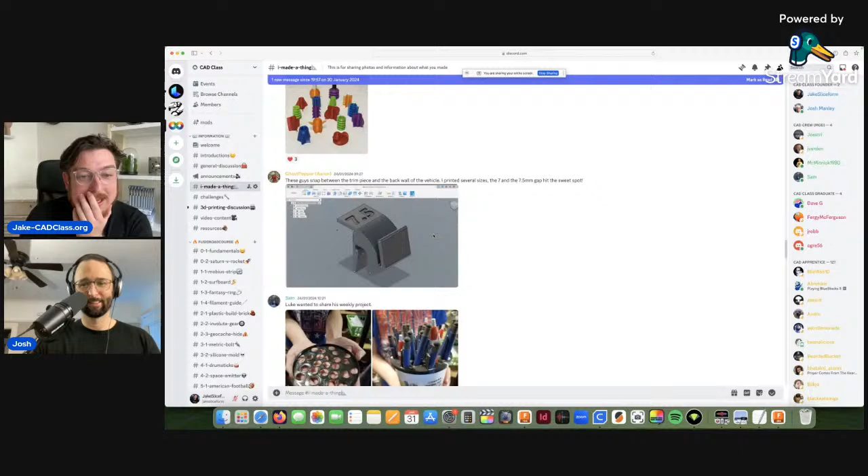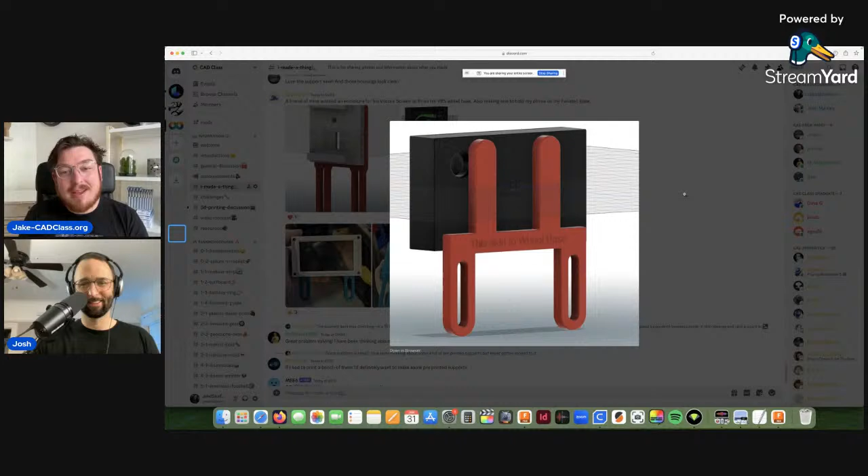Let's jump into it. As always, I'm usually the one seeing these at the exact same time as everyone else. So I want to go into the I made a thing channel. I'm going to scroll down to the very bottom. I did take a little sneak this morning. This thing that Wookoo's making: a friend of mine wanted an enclosure for his Vocore screen to fit a VRS wheelbase. I don't know what any of these words are, but that's rad. It looks like a screen mount for, oh, I bet it's a VR racing thing. That's really awesome. And it looks like they actually printed it out. That's a really nice print.

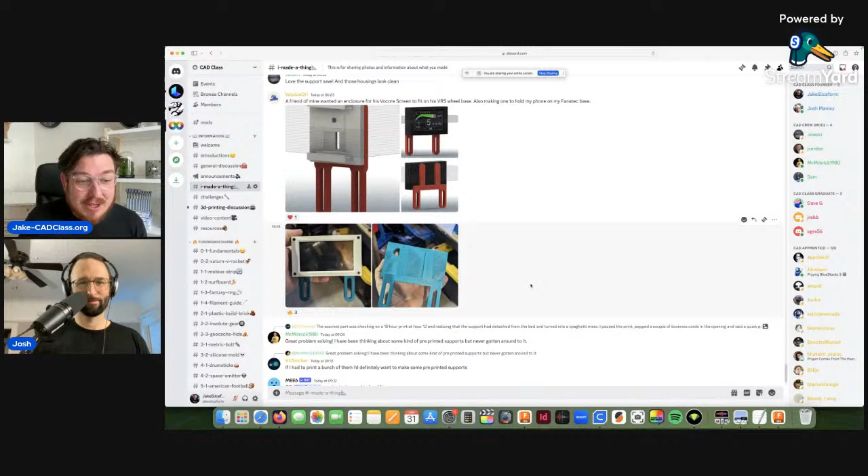Can I just say one of the best things that has elevated 3D printing so much is a textured build plate. For a lot of people, the original build plates were just glass or paper or tape. They were absolutely terrible, so you always had one surface of your print that looks like garbage. And now on all of our prints, the very first layer looks so nice and textured, you really can't tell that it's even 3D printed. So you always have one surface that looks so rad right off the bat. This is another great example of that. That turned out fantastic.

And then scrolling up a little bit, Kid Snicket, I think new. That's Cadence. Oh, is that Cadence? Yeah. All right. Finally finished some custom speaker housings for a Vespa scooter. That's awesome. Yeah, those look really clean. I hope the Vespa...

Man, I can't talk this morning. What the heck? Come on, Josh. What's going on?

What is actually going on with my voice? I'm like, you either had too much coffee or too little coffee. I think too little. I chug coffee. You know what? I'm not even going to say what I was going to say. Just ignore me for the day. All right, fine. Take it away.

Jerry's checking it out. 18 hours. With this though, Cadence, I'm curious what you printed that out of. I hope that Vespa is not a Sacramento Vespa where it gets to like 120 degrees, and maybe one day somebody comes back and part of their speaker mount is a little, shall we say, runny. A little melty. Yeah, a little runny. So I'm curious, if you're in here, Cadence, what did you print that out of? And is that the final thing?

And maybe one small suggestion would be use a higher temperature filament, like PETG. PETG is coming to mind for this. Yep. The scariest part was checking on an 18-hour print at hour 12, realizing the support had detached from the bed and turned into spaghetti. Propped up with a couple business cards. Yeah, and it does work.

I don't think it's available on Cura anymore, but there was a setting where instead of using infill, laying down an actual pattern and printing, it would just spaghetti the inside. It would use a fantastically small amount of material, but it would just randomly squirt in a bunch of plastic that, as soon as your part was done, would just jingle around. And for a lot of people, they're like, "Yeah, it works great," and it takes my 5-hour print to like 2 hours because it's using so little internal material. But at the same time, there's always a gamble that it actually doesn't work whatsoever.

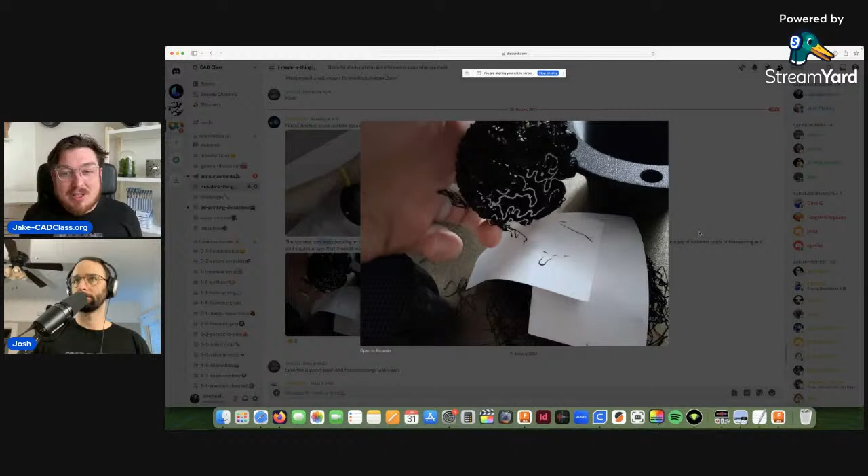So if you have support material and it's all internally held, having it go spaghetti is not the end of the world. It could still correct itself, but spaghetti on external supports, that's just going to fail. That's bad news. So propping up with business cards, actually supporting, that's genius. I love that. So good. And then it looks like the final print just turned out fantastic. It looks amazing. Yeah.

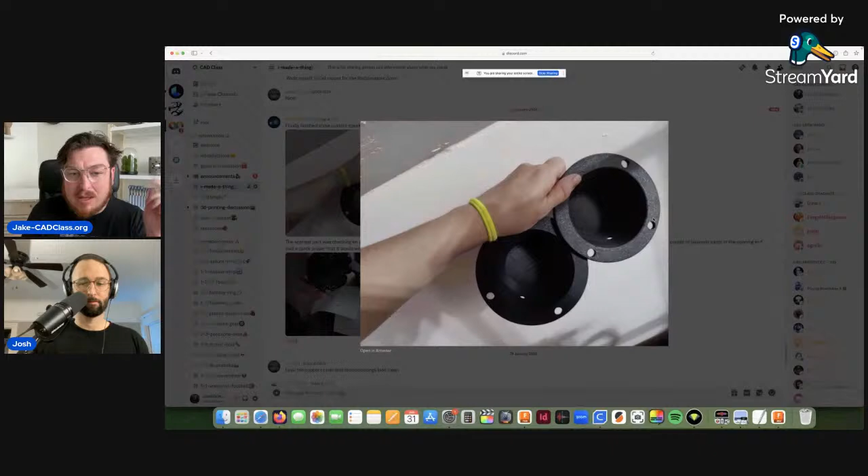So it looks like this surface right here, if you can see my cursor, Josh, was actually on the build plate, and all the material on the inside. And going through the other pictures, it's kind of conically angled. So if it was me, I probably would have printed it in this orientation and then just put supports around the outside, because that's a lot less support material.

The other thing I'm noticing with the supports is that these are very blocky. So I imagine Cadence is just using the normal infill. And I would probably push them to use the tree support, just because it uses less material, less time. More importantly, if you have less time on your print, it's just got a better chance of succeeding, because it's not spending as much time in a precarious state.

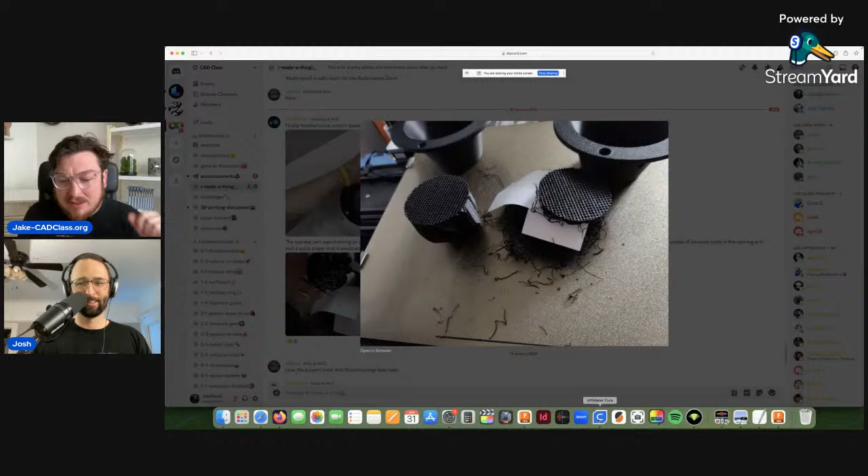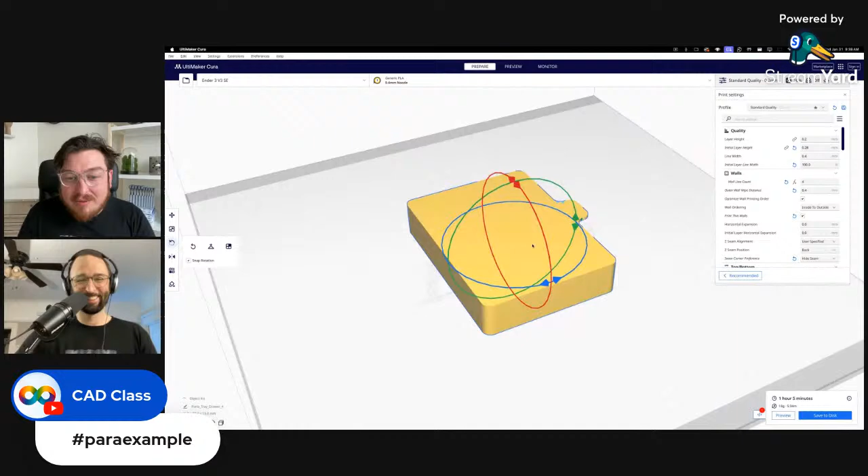The other thing that I found that really helps a lot of people out, I'll actually do a little example. I'm going to go to Cura really quickly, and I'm just going to open up something. I'm going to do a parts drawer. This thing can have some support material in there. For example. So if we just slice this up normally, obviously this isn't going to work too well. There's overhangs, yada yada yada.

But if we wanted to put in some support material, there are some settings that I really recommend. Obviously, generating support is the way to go. Set the support structure to tree. That helps out a ton. The branch angle is literally the angle that the branches of the trees are going off. And then the support overhang angle is 65. That is my minimum of where I would then put some supports. So anything more horizontal than that, I do want some support material on there.

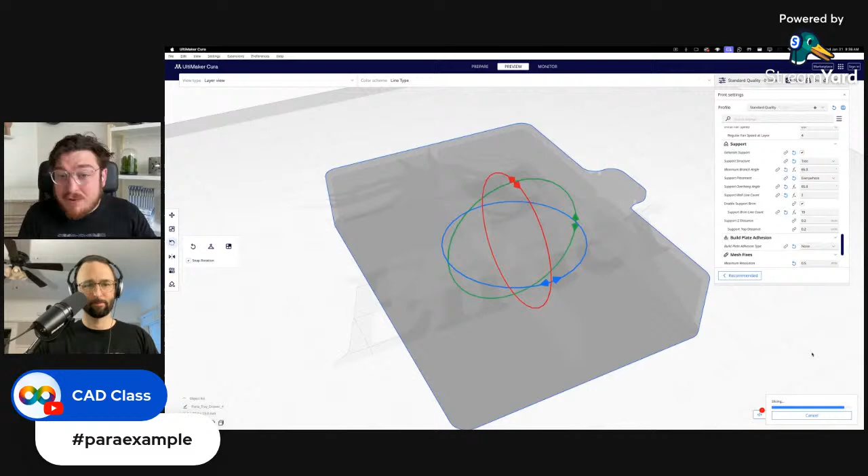Usually this is set to 45, which is completely unnecessary. 3D printers can print at 65 degrees all day long without needing any support whatsoever. And so if you have it at 45 degrees, it just means that you are essentially having a really rough, ugly surface on a place that you don't really need to, because every single time you separate support material, it's gonna look bad, just kind of truthfully.

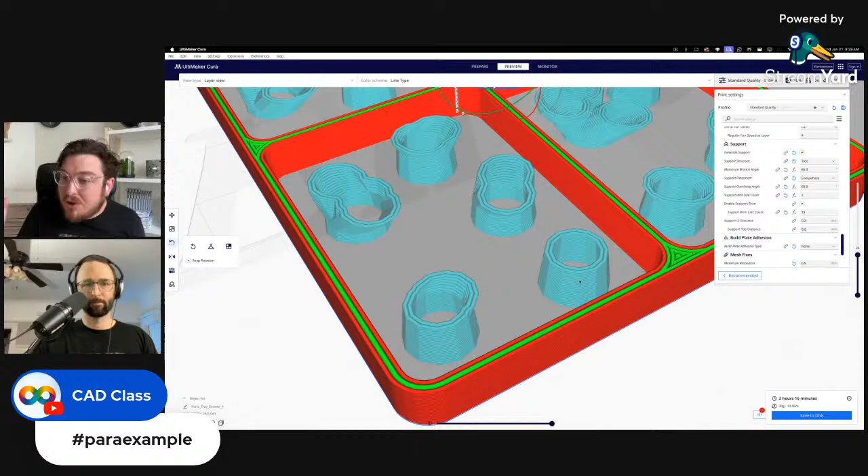The other thing that you may notice is that my support material is actually dual walled. So my support wall line count is set to 2. This gives me a little bit more rigidity in my support structure, and it means it's not going to fall over as much. But because this is such a short print, physically in height, not in time, I could actually get away and put that down to just 1 line count. That's fine. Anything where it gets a little tall, I usually put on 2 walls. That's the way to go.

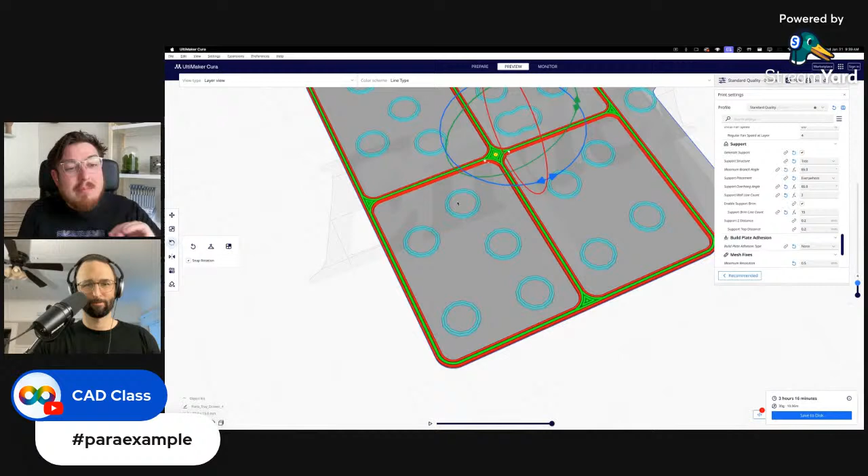But one thing that I do want to kind of put people on is on this one, there is actually no brim to the support material. So I actually do want to have that. But as you can see, I actually already have enable support brim. I even have it set to 15, and it's not showing up whatsoever. And that's because my build plate adhesion is set to none. So I actually have to reset this to brim to then enable that.

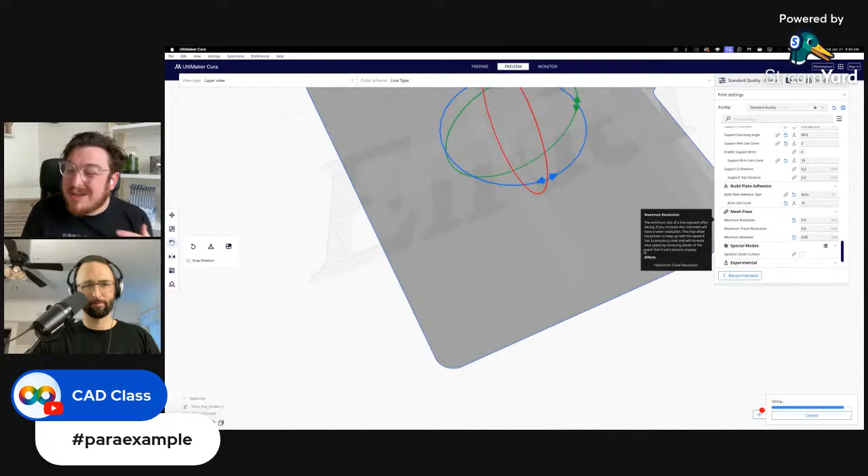The downside is that if I then set this to 0, it's going to give me an error. And so you kind of have to balance between having a brim on your part, so you have to do a little bit extra post processing work, but usually that little bit of work absolutely gets made up for by having a successful final print. So putting brims on your support material is absolutely essential, and then having 2 walls is the other really good trick.

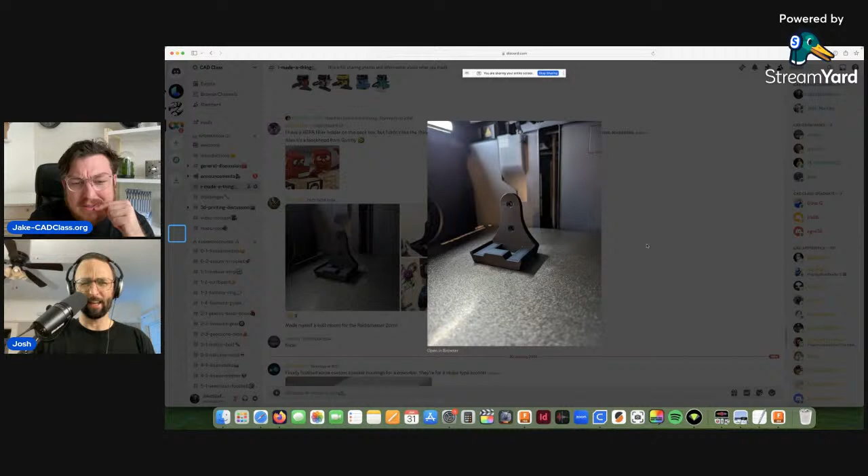All right, I want to show off some more goodies. This one really caught my eye. "I made myself a wall mount for my Radio Master Zorro." That's a nice, neat print. What printer, and who was it on Discord? Dairy Air. I can't believe you still get a kick. What kind of printer is that? Is that a K1? Go back. It looks like a Bambu, maybe, I can't really tell. It's a gray. Anyway, lovely prints.

Nice. Radio Master, not bad. Oh, this is for the... Oh, gotcha. This is for all of his drones. That is really rad.

Dairy Air, we may be reaching out to you because we are going to be putting a drone CAD project into edition 2 of our book that we're currently developing right now. So you may be getting a message very soon going, help. What are we doing? We don't know anything. Help.

I'm not sure I've seen this person. Electric Fish 9 printed a modified air filter that holds charcoal pellets. I used some red ABS for a project and put some faces on it. That's awesome. That's really rad. I love it. I do like anthropomorphizing, which is a super fun word to say on its own. Anthropomorphizing, just like super standard stuff. Yeah, that's awesome. It gives it so much character.

I think this is a good discussion point. Okay. How much do you actually know about the science behind the plastic particles that come in the air off of 3D prints? Like, how necessary is a carbon filter? Depends on what you're printing. Are you talking PLA or what material specifically? Yeah, or just plastics in general. They all have different properties, so they're going to off-gas different amounts of particles, so it really just depends on what plastic you're talking about.

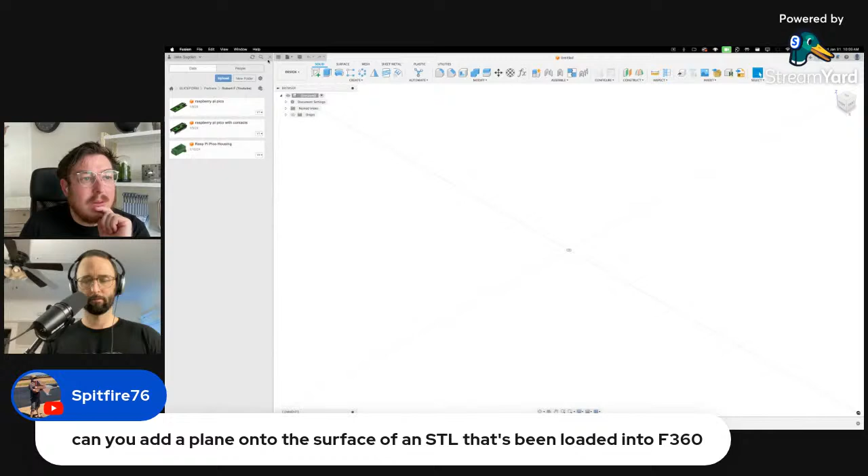I won't show you a model because it'll take a little too long to actually upload. But super duper easy. But there's one button that everyone always misses. As soon as you actually import a model, these are step files. Doesn't count. As soon as you have your STL in the middle, you'll want to go up to Mesh, and then you'll want to click on Convert Mesh. That's at the very bottom of the Modify tool, and it's basically asking you to select the body that you want. Don't worry about the operation of the method.

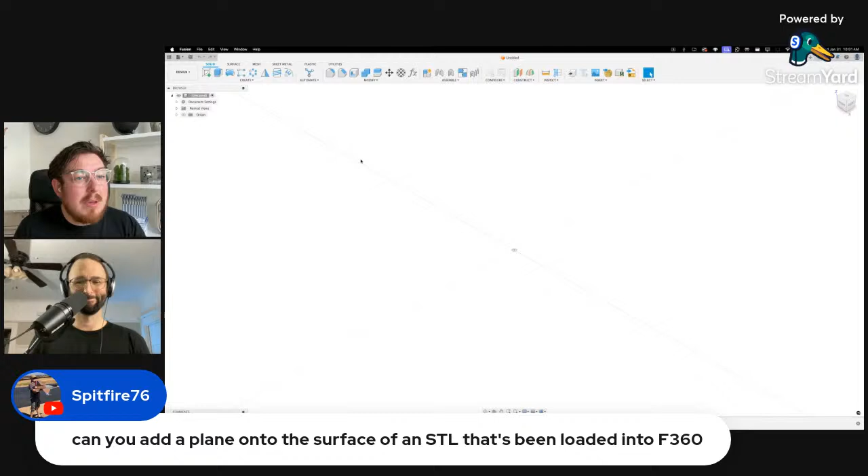As soon as you click OK, it will convert it from being a mesh, which is essentially just a surface. It's a blanket that goes over a 3D object. Then it will actually be a model, so a solid thing. And then all of the different faces will be clickable where you can put offset planes on. So that's the idea. But going back to which project do we show how to do that in, the silicone molding project? Yes, we do. With the skull. And that's in chapter 3. Chapter 3, silicone molding skull.

And then do we do it? Is that the only one we show it? I don't know. It's been a while. It has. It's been a while. Wait, who wrote this book?

I don't know. But the limiting factor is anytime you're importing an STL to be edited with CAD, be careful because it's very tricky. It's just the wrong tool for the job. You can kind of think of it like I have a piece of paper in my hand and I'm taking a picture of that, and then I'm uploading that picture to Microsoft Word, and someone says, "Can you just change that word? Can you capitalize that?" And you're like, "Well, yeah, I could rewrite the whole thing and then change it, but kind of no, practically." So that's kind of how you have to think about it.

Editing STLs is where you want to do it in slicer programs like Cura or Prusa Slicer. If you want to change something about a pre-existing model, make sure it is a step file or STP. That makes life so much easier.

Jake, I have a little bit of bad news. Oh no. Okay. So Fusion just updated, and they broke one of the tools that we use. They broke the coil tool. No. They broke the coil tool. So Serdar, on the geocache hide. Actually, I want to do this live on the pod right now. I know we're going to try to get to making something, but it says help please. So Serdar and the geocache hide: I can't create the coil in the dialog box. It won't let me enter revolution value to 0.1, and it won't let you change that.

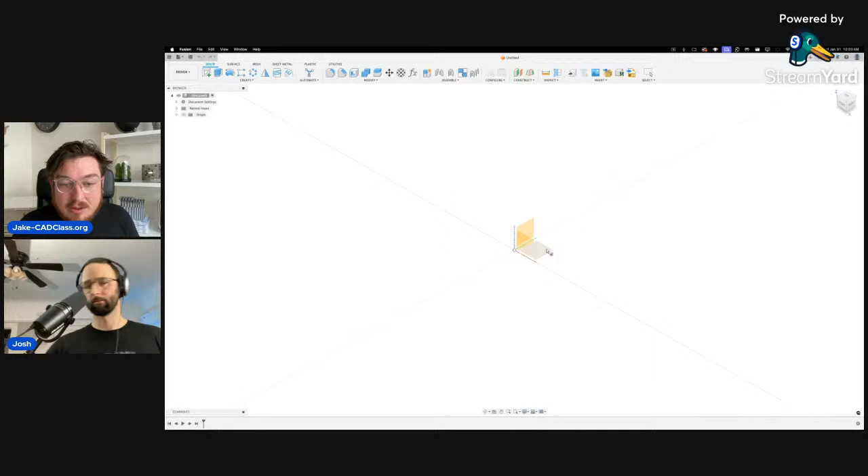Okay. So I want you to open it up. I just saw this on the Fusion subreddit, and somebody said the coil tool doesn't work as it used to. So that would be a huge bummer. But let's go ahead and open it up. I'm going to make that right now. Let me just grab one of the books really quick. I'm not going to do the whole thing to exactitude, but I do want to give you guys as much accurate information as we can. Oh, God, why did we make this book so big, Josh? I don't know. Okay, so I'm just going to start off with making a cylinder on the top plane. We'll see how fast we can do this.

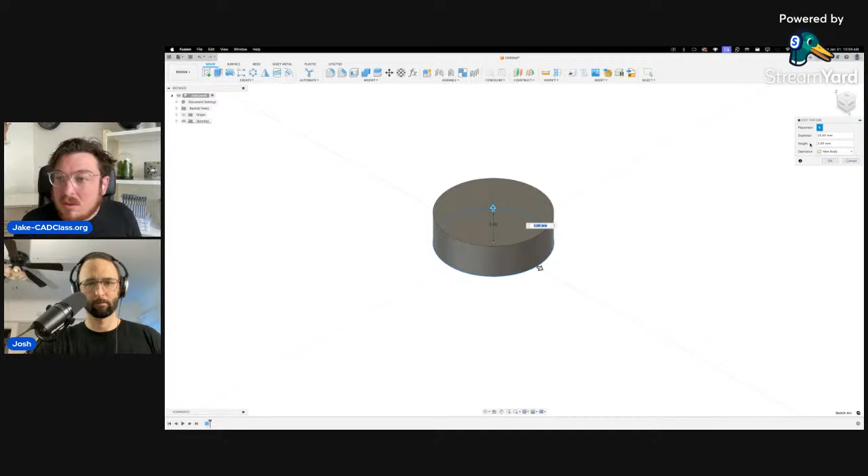Diameter 33, 16 mil tall, grand. Looks good. I want to add a thread onto the outside of that surface. Make sure it's modeled. Groovy. I want to change this over to an M33. Oh, whoops, I did it the wrong way. Diameter 33. That one is 16. I knew it looked weird. Funky. All right, then we added on a thread. This is modeled. Groovy.

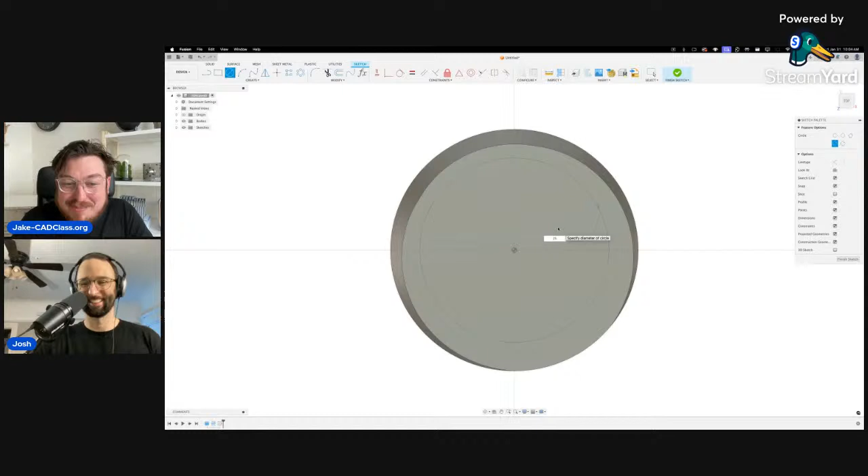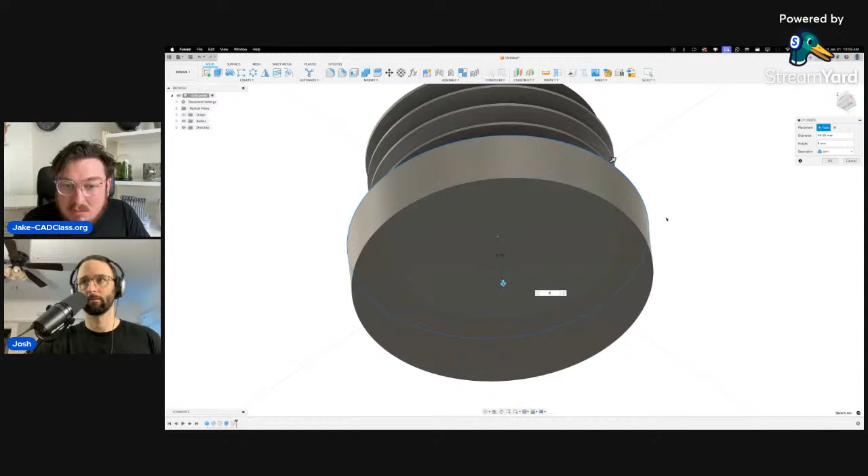Then we are cutting out the very bottom, adding on a circle to the middle. How big is the circle? I really wish I remembered the book I bloody wrote, but I totally don't. Then I'm going to be extruding this all the way through. Don't really care. Make a little triangle to cut that away. That's not important. Then I can make another cylinder below it onto that bottom surface. Great. This wants to be 40 and -8. 40 and then go down 8 millimeters. Groovy. So making a knurl is actually fairly easy.

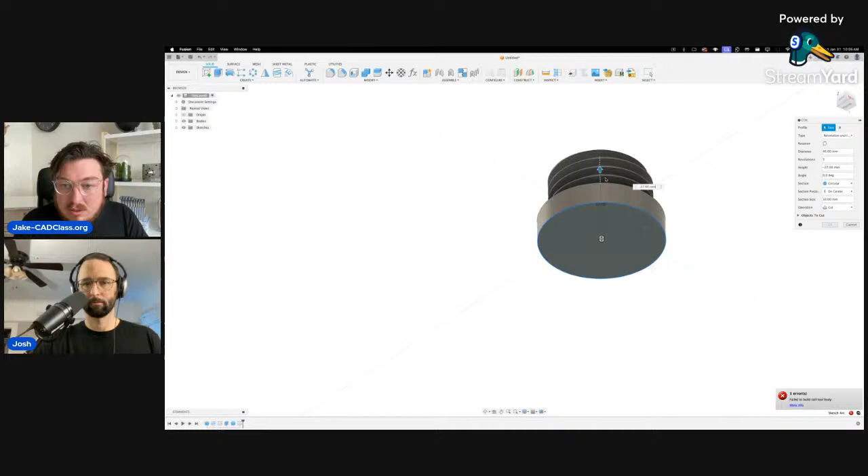So we're going to be using the coil tool. I want to select that circle. So I'll start at the origin, pull out to that 40 millimeters. Okay, and then I'm just going to be bringing this arrow upwards, so it's actually going to be cutting in the right direction. Obviously, it's the wrong shape and size. But the diameter is 40 millimeters. Yep, the revolutions is 0.1.

That doesn't like it, but we'll press on. That's exactly the error that Serdar got. Right there, that error that you're getting. Triangle internal, it's on the inside. And this is a 1.5. There's a cut. What the hell? Okay, so what happens if I increase it just... So it likes 1.

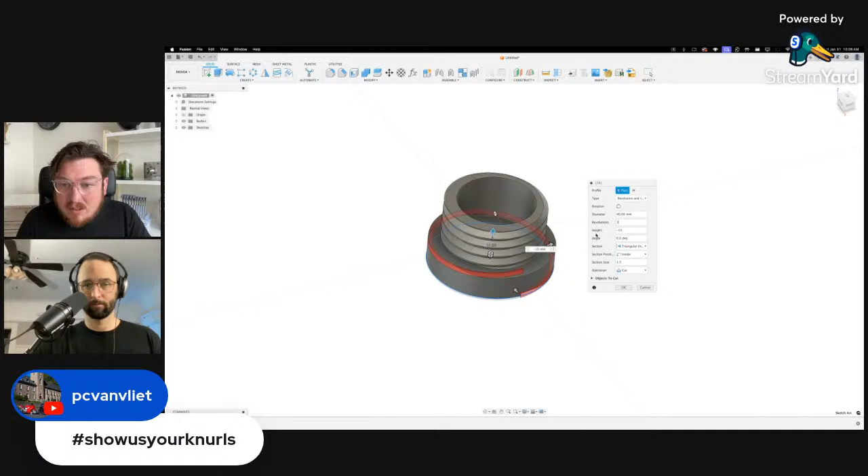That's very strange. If I go to 0.9, it doesn't like it. Error. Yeah, this is exactly what it said on the subreddit. It said anything under 1, it won't take it. That's really strange. That's very, very funky. Why would it do that? Let me change it to a different type. So that was revolution and height. We'll do height and pitch. See if we can mess around with that.

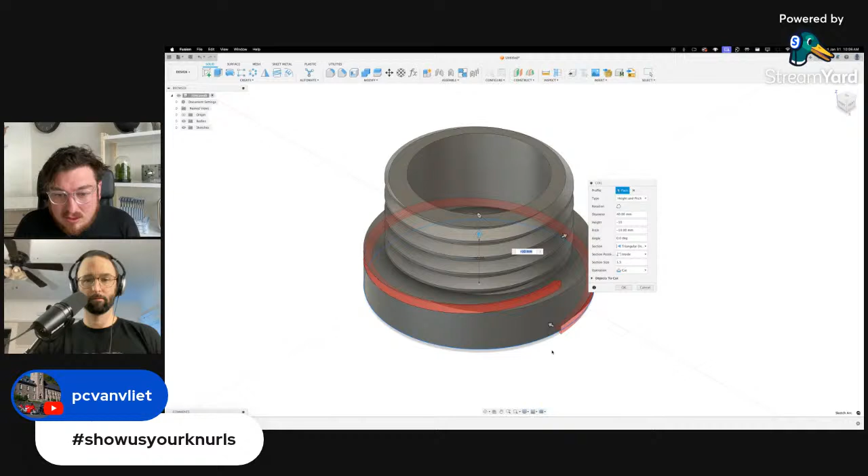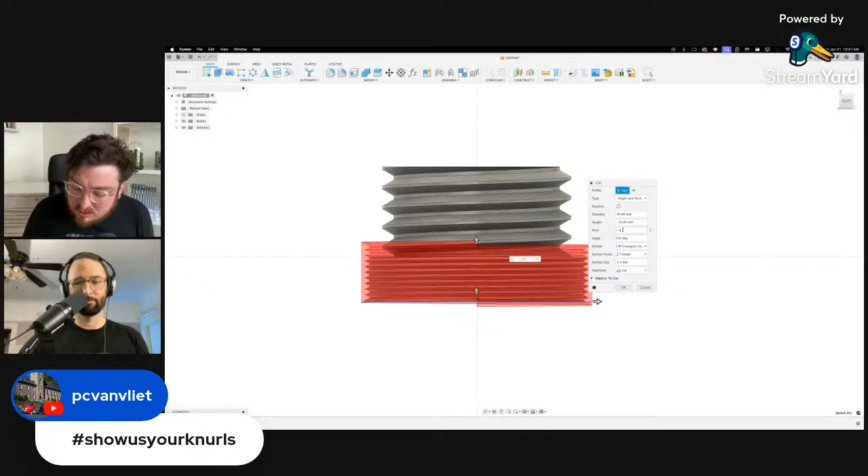That's the inside. Don't want that. Pitch. Oh gosh, no, that's no. What? -5. Can that be a positive number? Oh, that's going the opposite direction. -1. No, that's not what I want. So what about -100? Oh, yeah, it must be based on the revolutions of it. So it doesn't like that.

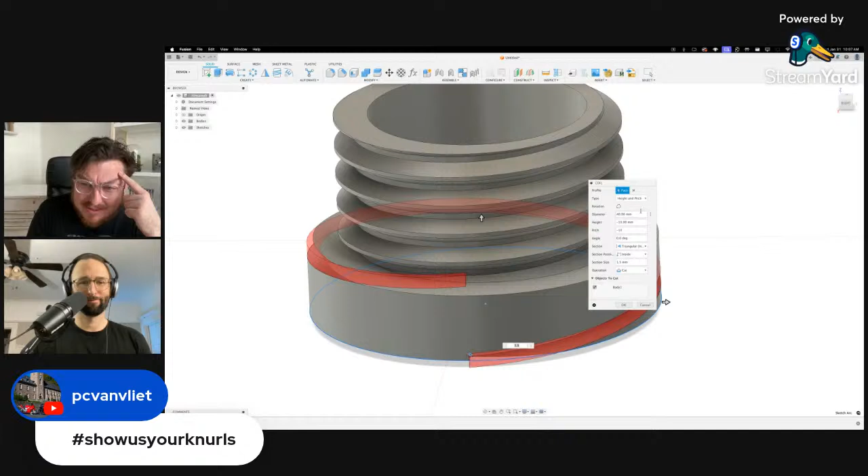25? 20? 10? Oh my god, that is so strange. Yeah, it won't go anything above that. So even like -11 for the pitch. Oh, that's so bloody annoying. Why would that even be a thing? That's such an... Oh my god. So yeah, that's not going to be... So then it doesn't matter what you choose, it's just going to be restricted to 1. That's really fantastically annoying. Okay, guys, we'll show you the fix.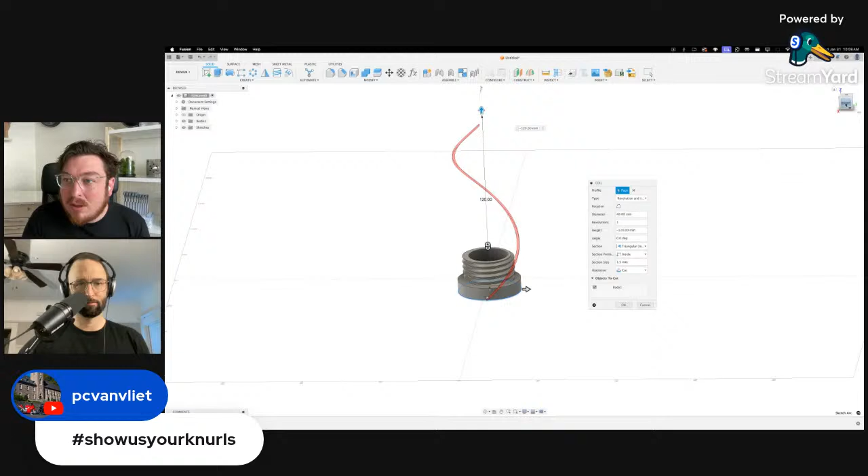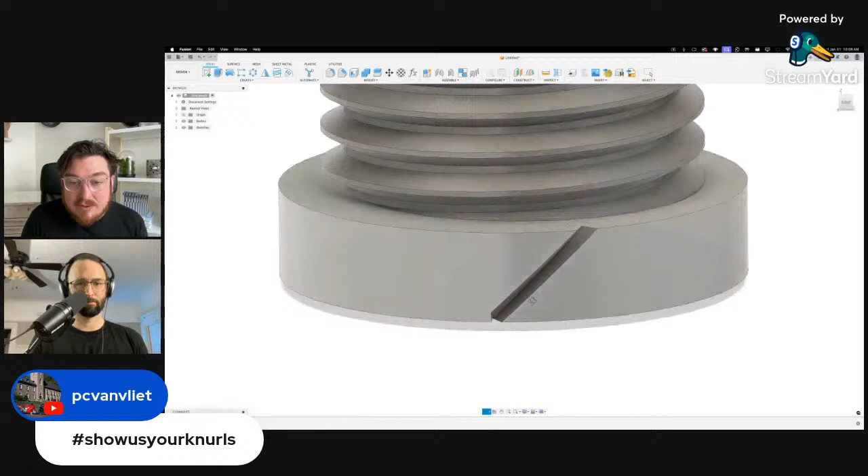And that is simply to keep it as 1 revolution, but to bump up the height massively so you can still get that angle. So the idea with the knurl is that to make a diamond pattern, you want this to be at about a 45-degree angle. So instead of the revolution set at 1, the height, instead of being just the height of this piece of 16 mil, just massively crank it up. That gives us our cutaway at about the right angle.

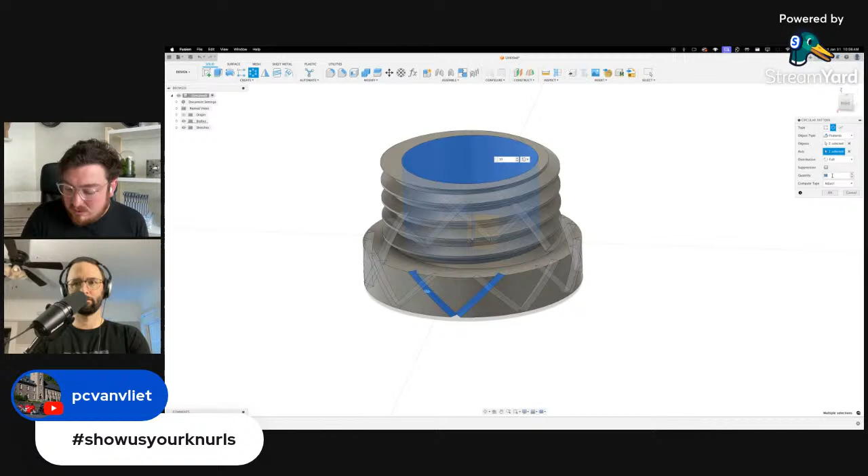Then we can mirror that feature. Mirror that coil about the front plane. Yep, cuts it away. And then we can do a circular pattern of the features. That would be the coil and the mirror. And then the axis is around the center. Then we can increase that to whatever we want. 20, doesn't really matter. And then that'll solve in a second. Yeah, that works. Gosh, that's really strange.

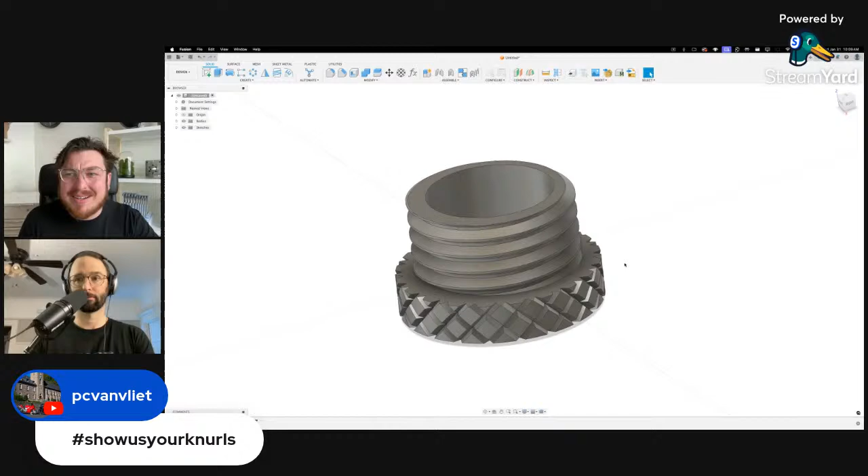I've never seen that before. I think they just introduced that bug. Something broke it. There's no way that's a feature, that's a bug. God, that's so bizarre. Gosh, okay, well, I hope that helped people that are actually running into that issue, because that's ridiculously annoying.

We're also going to have that issue in the fire piston, right? Yeah, as well with any of the knurls, actually. So anything that's knurled, we're going to have to add a link inside the course and then edit the PDF. So we'll add that to our edit list. That's super frustrating. I mean, we know some people on the Fusion 360 team, so we'll definitely reach out to them and say, hey, fix it.

Yeah, super bummer. Anyways, slightly related but kind of not really, Fusion 360 is changing its name. In fact, it has already changed its name. It is now no longer Fusion 360. It is Autodesk Fusion. Woo! Can you picture how many executives needed to sit in a room, and for how long, to make a decision about that 360 part?

Like, hey Bob, so it's Fusion because we're joining a bunch of different parts of different CAD programs together. Yeah. What the hell is 360? Oh, Jim thought of that. Well, Jim's fired. Yeah, Jim's gone, he hasn't been here forever. Let's get rid of that 360. I mean, can you imagine the branding nightmare?

All right. So if I'm making a hole that I'm going to be printing where the axis of the hole is parallel to my build plate, if I just make a little wall right here, and I make a little circle in the middle, and I extrude it out just to give it a little bit of depth. If I know that I'm going to be printing it in this orientation and I'm putting a rod all the way through it, everything is going to be totally fine on this bottom surface.

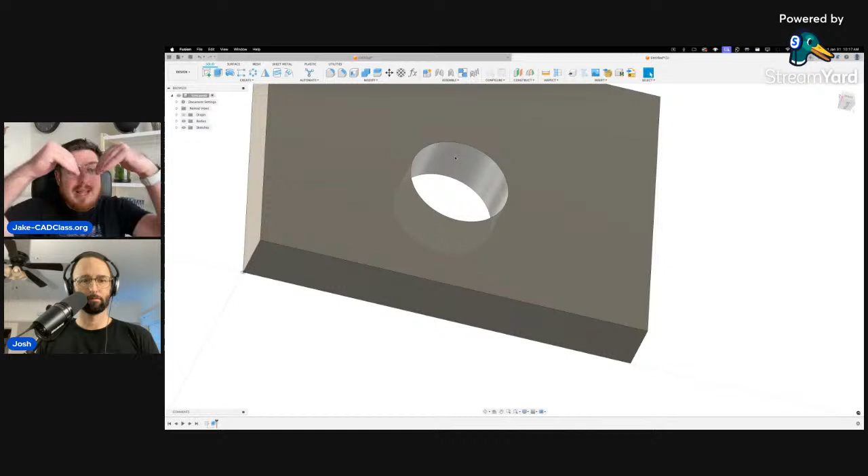But at the top, that's where the plastic actually will fall in and droop a little bit, and it gives you a really, really crappy surface. So it means the cylinder won't be able to pass through, or the rod won't be able to slide in very easily. There's going to be swarf, which is the more technical terminology. It just gives you a pretty crappy surface.

So one of the things that you can do about it is to recognize that you can print at a 65-degree angle and delete some of that material. So you can basically make some tangent lines, if I just add on some tangent constraints, make these totally equal. We want to make sure it's obviously right above the center of our circle.

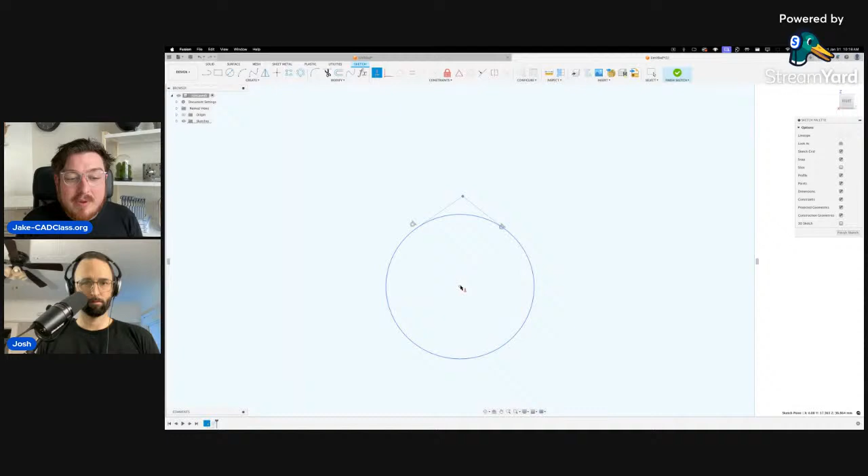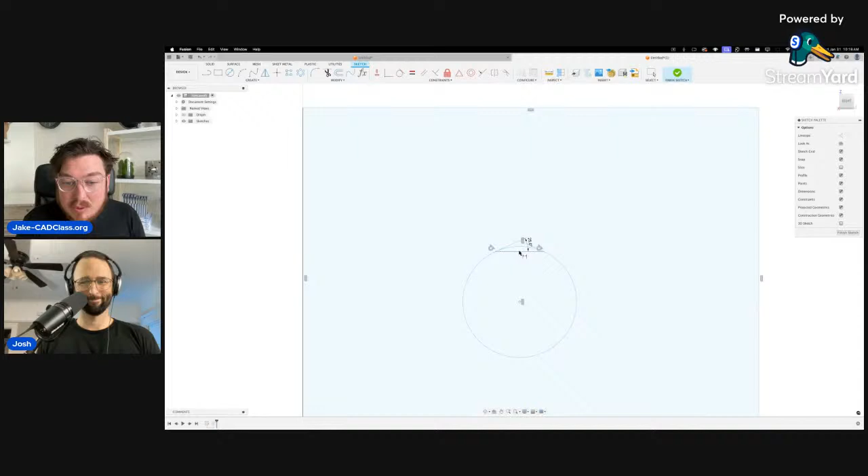But if we make sure that these are printing at 65 degrees, so if I make a little construction horizontal line and set it to be, like I said, 65 degrees. Oh, whoops. It should be 90 minus 65. Excuse me. There we go. Yeah, 25 degrees. Then we actually have this kind of party hat surface to it.

Yeah, there you go. So it is mostly a round surface, except for the top sections where we know these tangent angles are going to print perfectly fine. There's not going to be any droopage, and we still have the majority of a round surface. That's the idea. If that makes sense to you, Josh, then I guess I'll continue onwards. Does that make sense? That makes sense.

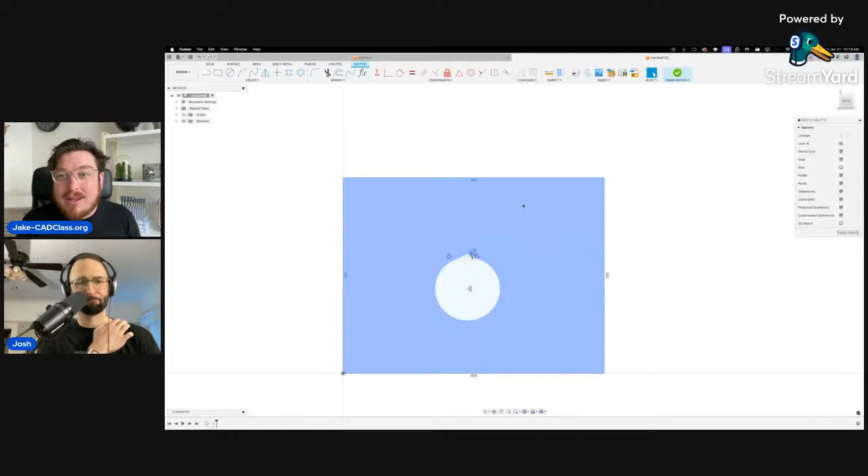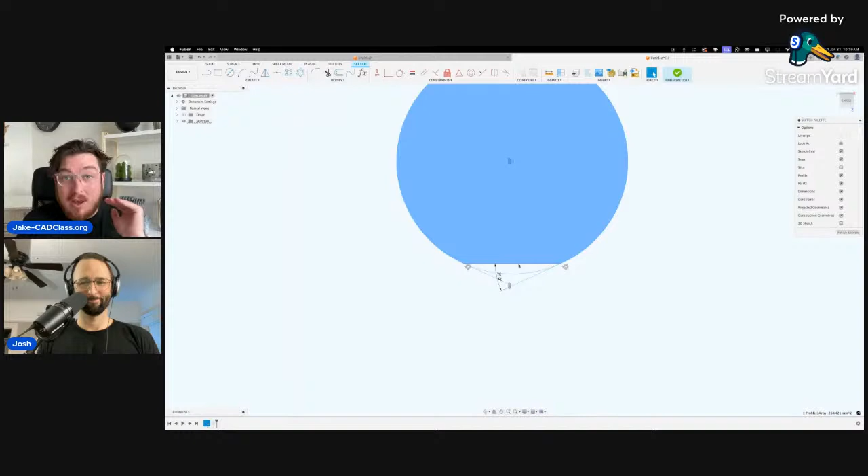Yep. Okay, cool. So I'm actually going to be treating this kind of like the underside of a bolt, where instead of a construction line, this edge is going to be the underside of my bolt. And this is just going to be the cross-sectional area of my bolt. So you can see the vast majority of it is circular, and there's only a small portion that is actually a flat section ground onto my bolt.

But because it is only based on this degree, there's actually a perfect ratio between the diameter and the distance between the center to that line. So you can make it anything you want. I'll actually do the math for you here. So all the aluminum extrusion on our Ender 3 that I have up there that I keep on looking at, it's all 2020. That means 20 millimeters by 20 millimeters.

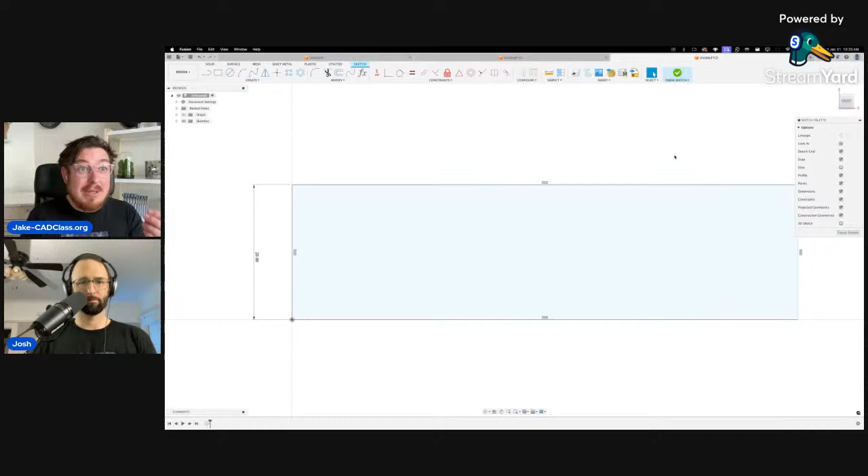So if I have a top-down look and I can see that my aluminum extrusion is going to be 20 millimeters, I know that I'm actually going to be beefing out these bolts quite a lot because they're still 3D printed. So I actually think I want to have about a 10 millimeter thread, and then, gosh, maybe even like a 15 millimeter head. Does that feel about right for you, Josh? Yeah. Yeah. This is something that I've just been thinking about for quite a long time.

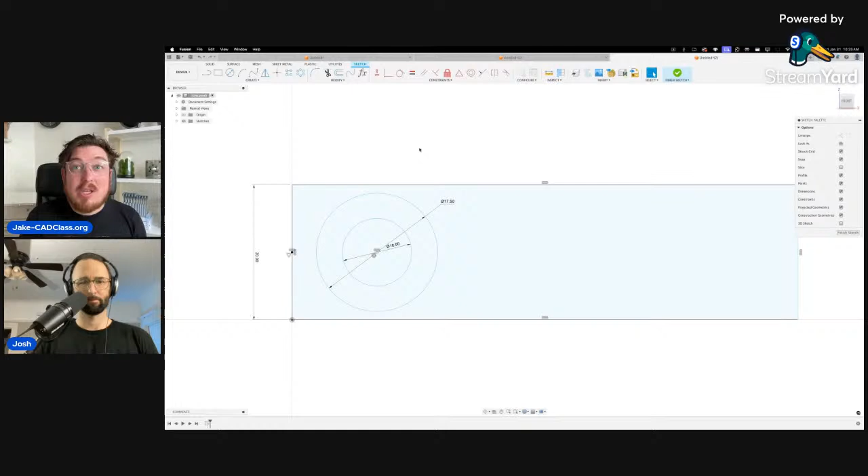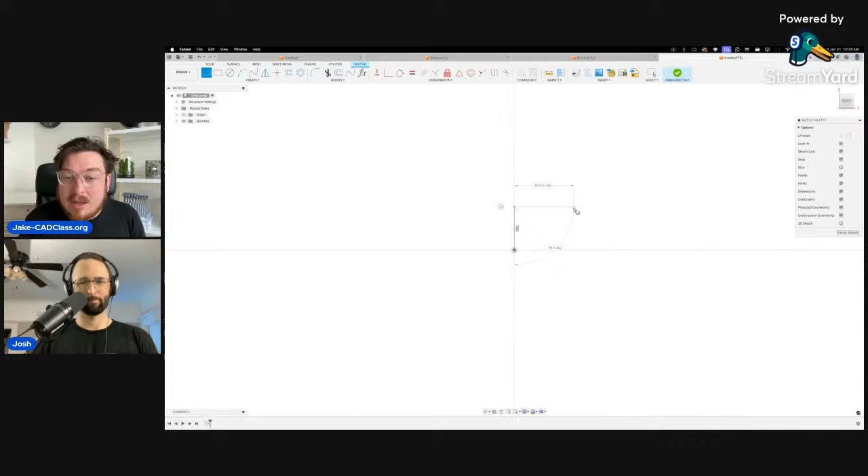Maybe even, gosh, 17.5, because it just needs to have so much meat to actually be used as a bolt for 3D printing, because there's so much movement with the rack going back and forth, all these vibrations. They just loosen things so much. So let's say 10 millimeter thread and 17.5 actual head. That works. So if you've done the metric bolts project we have in the book, then you know exactly what I'm doing. I'm just making the side profile of our entire bolt.

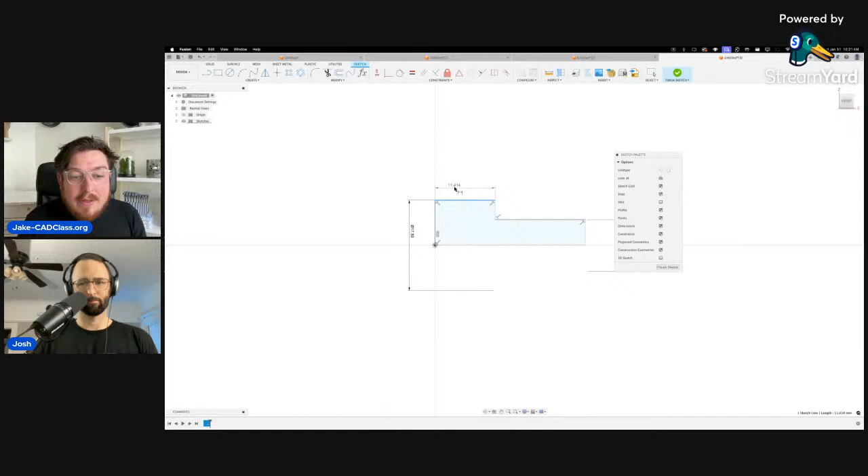I'm going to be making this bottom flat section a center line, just so I can measure things a lot easier. So I can say the top section to there, so that means the diameter, or the diametric dimension, is 10 millimeters, and the distance from there to there is 17.5. Lovely. The height of the head, yeah, probably 10 millimeters. That's fine. And then these are 25 bolts. Remember that. So as soon as I do a revolution, perfect.

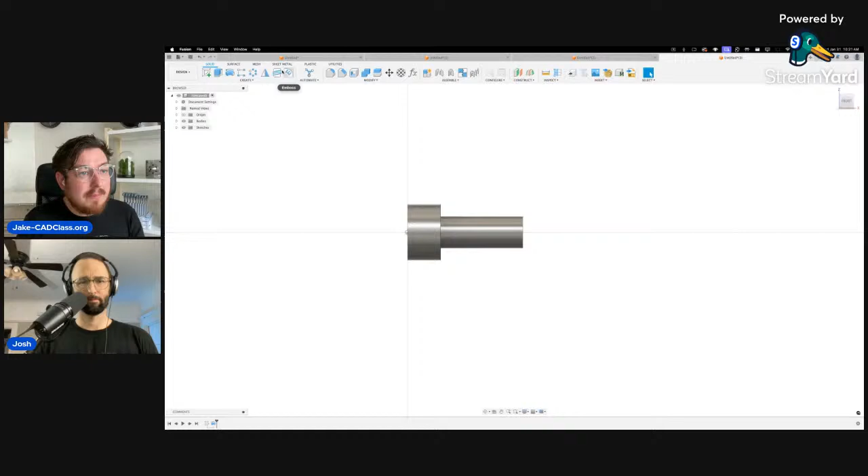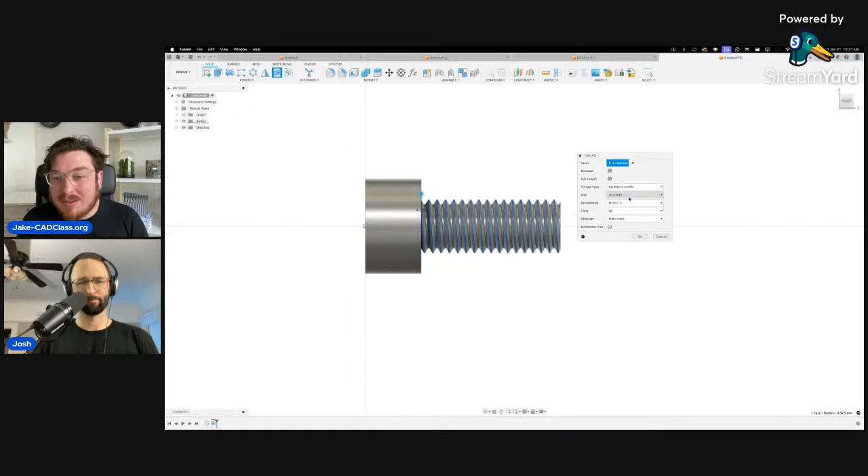But my thread is going to be an M10. Great. That's going to be nice. That's going to be chunky enough where it holds on perfectly fine for a 3D print. But I may actually want to go lower. Can I go lower? M10 by 1? No. I kind of want a chunky thread, but not so much that it fails. So maybe the 1.5 is fine.

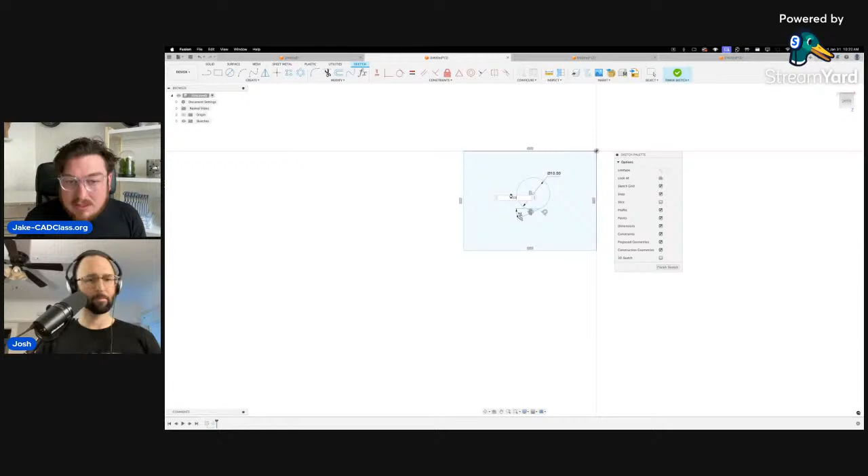I'll end up cutting the hexagon in the back, but really what I want to do for this mini project is cut the underside of there. So I'm going to be cutting a flat section on here. I can just make a center rectangle that is exactly below there. Going back to my little sketch that I had, I say that this is 10 millimeters. And then the distance between there and there is going to be 4.5.

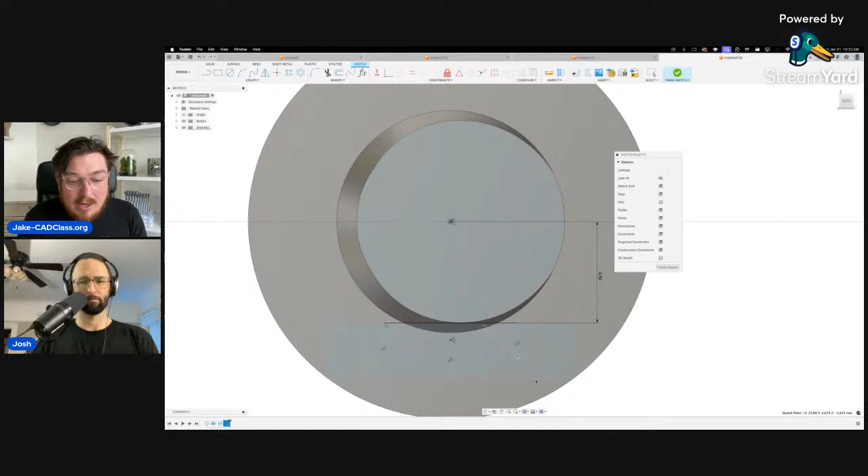That's going to be a perfectly fine amount of accuracy for this. I really don't need to go any more than that. So the distance between there and there, 4.5. Lovely. It's only cutting in just a little bit, which is actually exactly what I want. I don't really care about the size of this rectangle as long as it's cutting outside of this surface area, which is my thread. That's fine. So then I can just extrude cut this rectangle, and then I'll say that my extent type is to the underside of the bolt head.

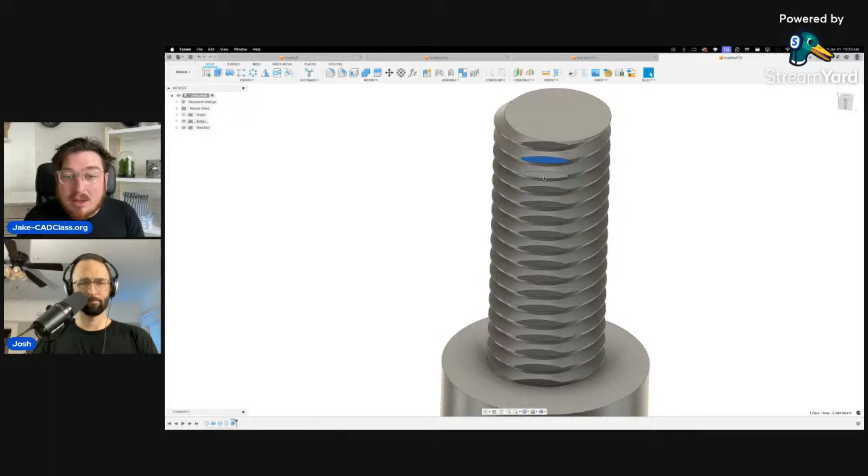There we go. So it can support all of these little cut-off surfaces perfectly fine. Obviously, the angles of the threads, not a problem. But this will give me a really successful print without having to do anything else with it. Even more so because I know I want it to print in this orientation where I have my flat section on the bottom. I can do the same thing for my bolt head.

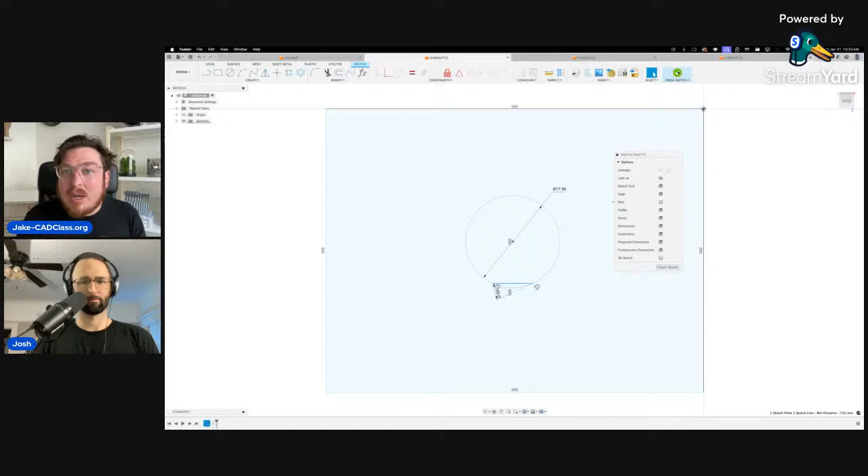So I can go back to my little circular piece and say my circle is now 17.5. Oops, why is it saying that? Oh, it's because I locked it. Yep, 17.5. Lovely. Oh, it doesn't like it. Why doesn't it like it? 17.5. Grand. Yep, distance from there to there, that would be 7.93. Lovely. So I can make another sketch on that flat head. Make a little center rectangle. Make sure everything's nice and neat. Totally forgotten it. What was it? 7.93. There we go. So then I can cut off the little bottom section of my bolts.

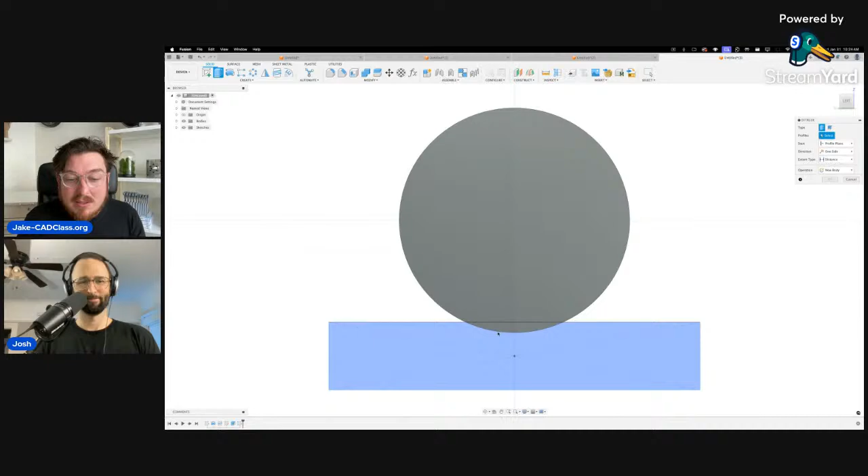This will make it print way better. Like I said, the majority is still round. It is still a normal bolt. I'm just editing it in some small ways to make it as 3D printable as possible, really. And then the last thing to do for this bolt, other than put the obvious head on there, would be to make the little triangular cutoff.

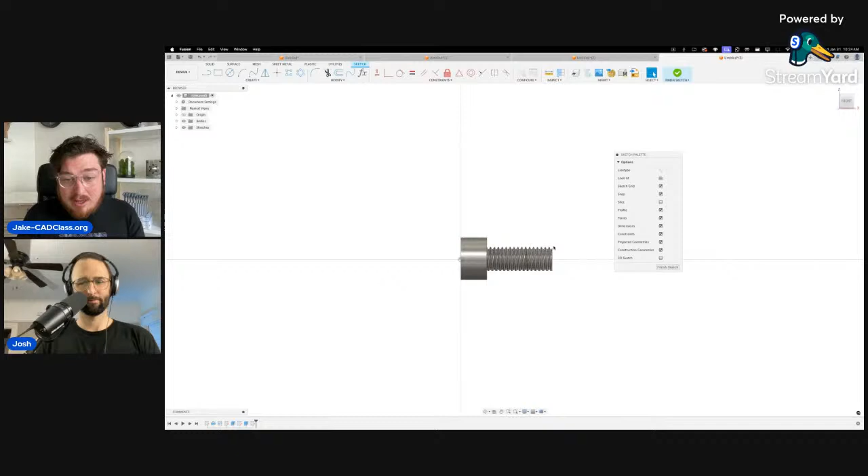Really important. I do still get a lot of people asking why we actually have to trim off this little triangle off the corner of our print, and it's very, very simple. You cannot chamfer a bolt and then thread it. It just doesn't work. You need to make the thread first and then cut it off later. That's just kind of how it goes.

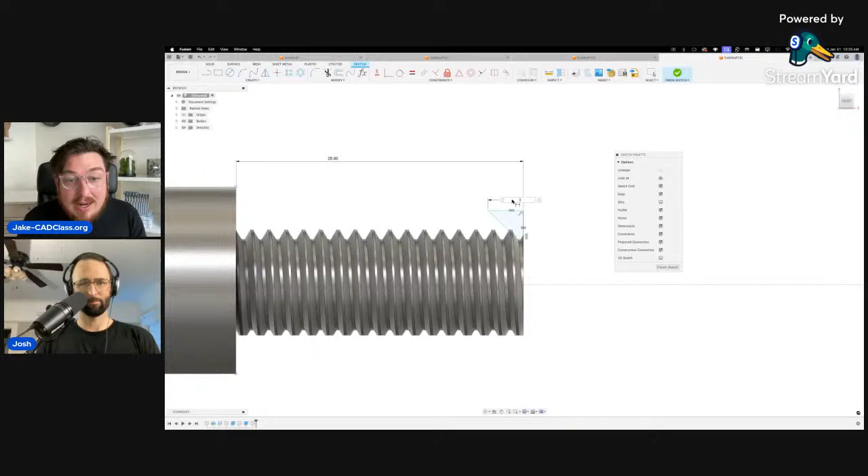So 1 millimeter, it's perfectly fine. I'll say that it's 5 mil above there, just so we know we're cutting all the way through. Do a little revolve cut around the axis. Lovely. This is now cutting away some material following along the circularity of the bolt head, and it just makes it a lot easier to actually cut it in.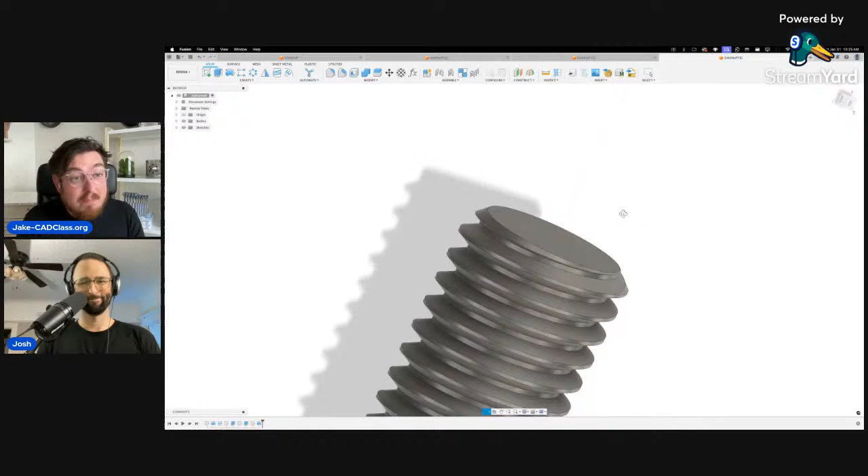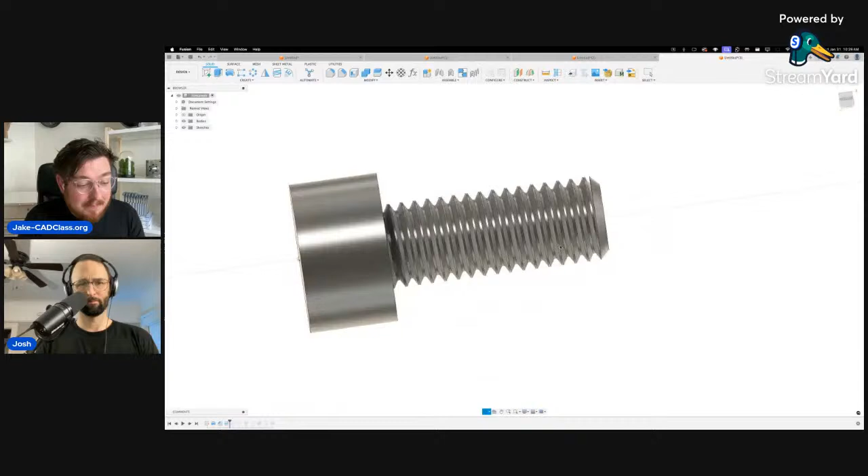If you try and apply a chamfer before you add on the thread, you don't get the same effect at all. In fact, it won't even put itself onto a bolt at all because it is almost a complete nub. There is no beginning to this thread because it's kind of tucked under this overhang of the chamfer. So it really doesn't work at all. So you always have to do this triangular revolve cut just to kind of mirror what you do in real life.

When you're making a bolt on a lathe, for example, you'd use a die to actually cut away all the material to make this thread. Then you would take a file, hold it at 45-degree angles, and then just cut it away, basically. And that's how you get the entrance of a thread to be really nice.

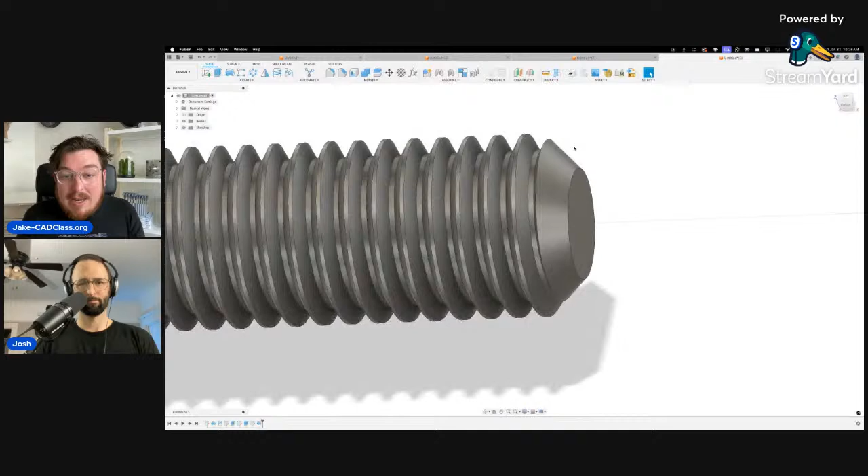And depending on how large the bolt is, you can then change the size of that triangle. So if I go, it's too small, I can just bump that up to 2 millimeters, and it just makes it even easier to insert into our project. So yeah, there you go. Pretty easy project. Nice. Yeah, not bad.

We have one final order of business, I think. Do we? And our challenge last week seems to have gone unchallenged, untested. I didn't get a chance to make any modifications to the geocache and actually hide one. So I don't know that anybody else did either. But what are we going to do this week? What's the challenge for the week? What do you got for us? What I have is an idea.

I really want you guys to print some accessory, whether it is functional or purely aesthetic, for your 3D printer. But it has to be something that you design. I did see the guy that made the HEPA filter for his 3D printer, and then he put a little face on it. I love that stuff. I know Josh loves that stuff as well.

So I'm challenging you guys to actually design something. If you can't think of anything functional, that's fine. But I want you to make something aesthetic to kind of show off your printer. I really want to see all the cool stuff that you guys make.

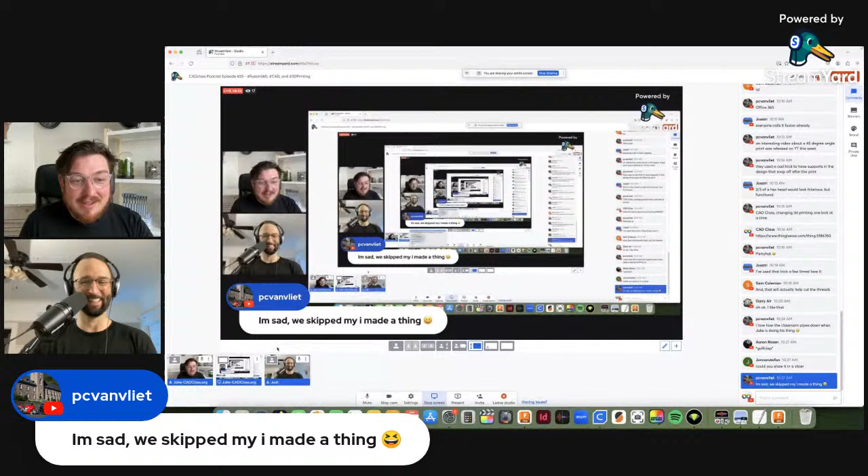Amazing. So okay, we got a couple minutes here. PC Van Vliet, one of our best posters, is like, I'm sad we skipped his. No, we're not gonna skip it. So go back. We're not gonna skip it. That'd be very rude. Is that Mr. Mitnick? That is Mr. Mitnick. Gotcha. Okay. So today, two things, actually. Oh, that's right. You did, didn't you?

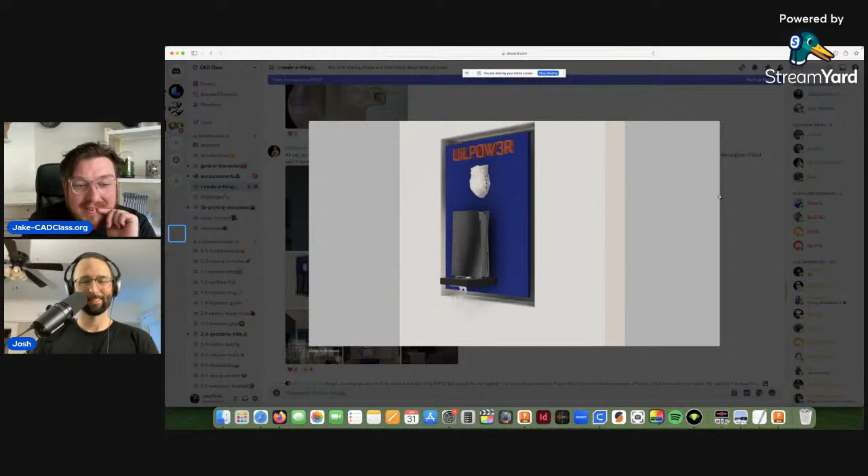Yes. Installed my ESP32 light project. Concept we made in Fusion 360. Neighbor said it exceeded his expectations. That's rad. Okay. Let's check it out. Little blank canvas. That's pretty rad. Keep going. Oh, it's like a frame box. Yep. Okay, so I'm seeing some JSTs, little power supply, little plug. Nice. Oh, this is with the owl project. Yes. Oh, yes. Okay. Dude, yes.

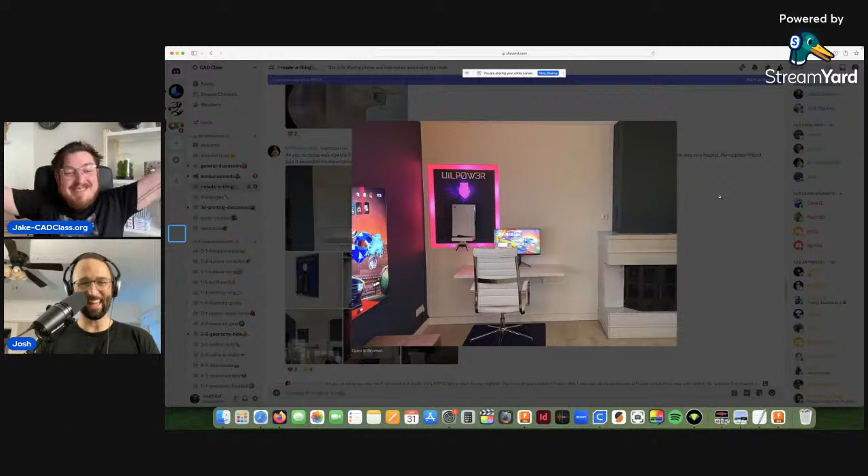That's so freaking rad. Derriere says, I'd love to see more photos of that project. I agree. Whoa. Dude. This turned out so well. So well. Hope you don't mind me swearing. Holy shit. Yeah. That looks amazing. That looks absolutely fantastic. God, that's so rad. I don't even know how you did the little twinkly effect at the beginning where it just kind of flutters. So cool.

So cool. And then Josh, we're just surrounded by people who are so much better at stuff than we are. That's right. That's exactly right. And then we sit up here and talk like we are important. It's crazy. Yeah, that's how the world works.